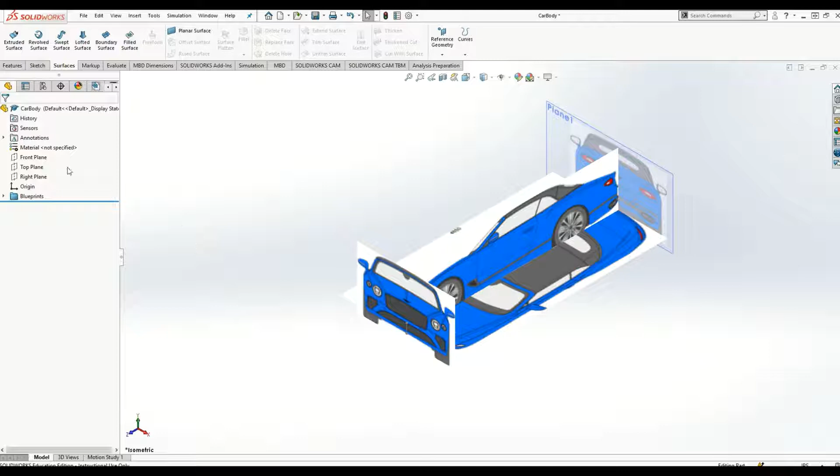We'll again start on a sketch on the top plane. Control 8 to bring it normal. I'm going to do this portion of the hood and just use mirror.

I'm going to start in the center here, drawing a line, and then use a spline. Remember, when we use splines, we want to use as few inflection points as possible, and just use these controls to control the spline. Then I'll exit sketch and create a sketch on the front plane.

New sketch, Control 8 to bring to normal. Here is my previous sketch down here. When I draw this new sketch, I want to make sure that the start and end points are the same as the start and end points of the sketch we just drew. So I'll use a line again, hover over the origin, drag this up, and draw a line there.

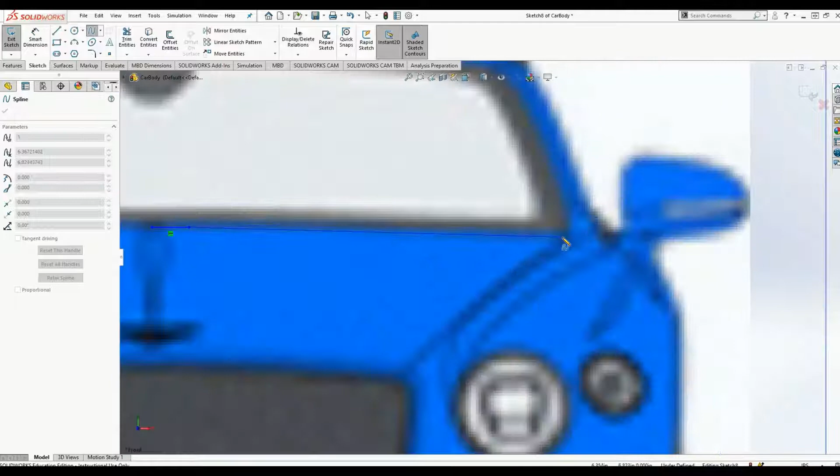Then I'm going to use a spline to go to this point here. I don't want it to be horizontal. Oh, I forgot to make this endpoint the same length as that one, so I'll do it right there. Now these points line up.

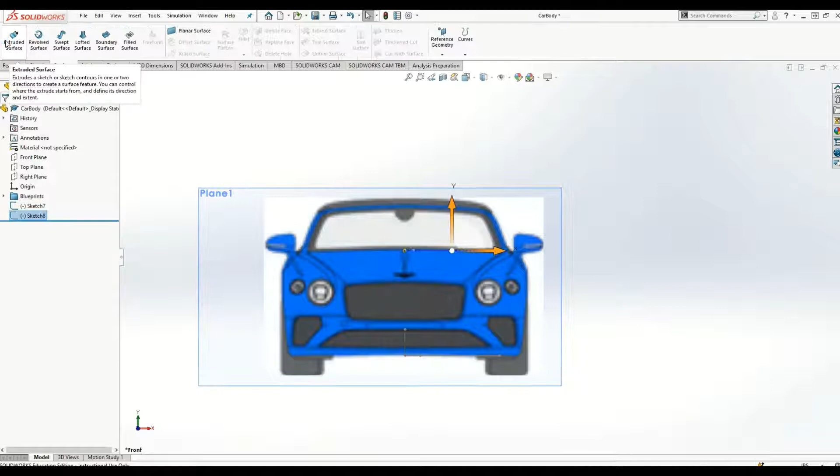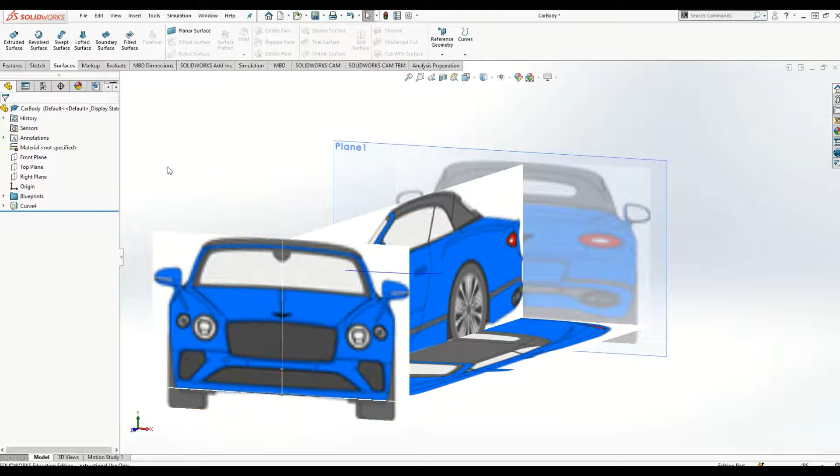Now I'm going to exit sketch, and I want to bring this sketch up to this sketch here. So I'll hold shift and select both sketches, go to the features tab or surfaces, curves, project curve. There's the curve, click the check mark. It brings this curve from the top plane up to where it is on the front plane. If I go back to the top plane, Control 8, there is our curve right there.

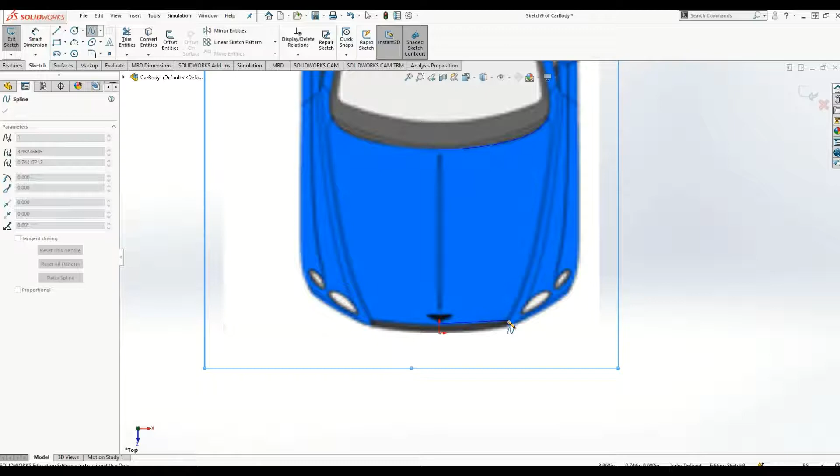I'm going to do that exact same process right here. I'll start a new sketch on the top plane, and draw a spline from the center here over about right here. I'll bring this down a little bit. Remember, use as few inflection points as possible. That's good for now.

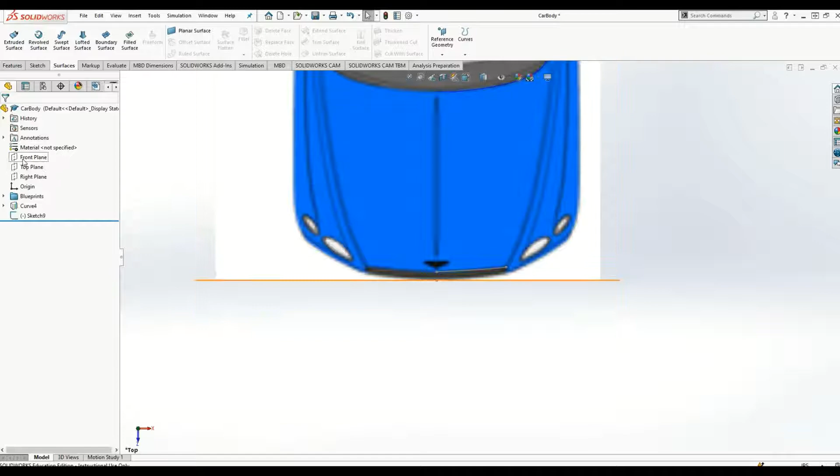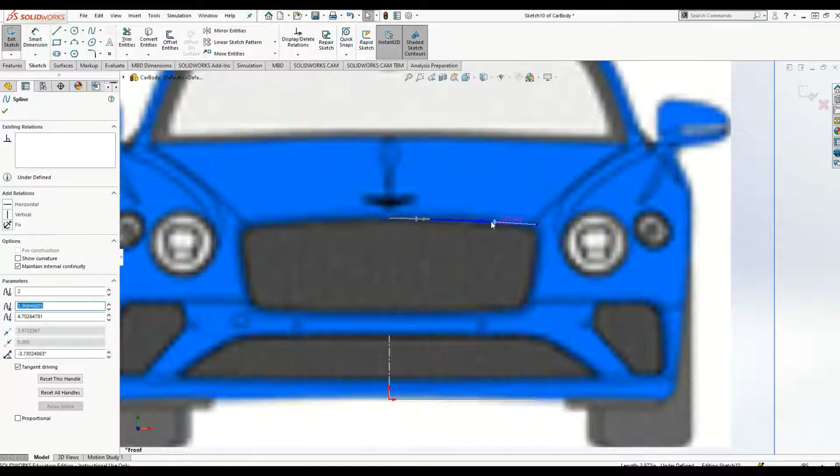Then I'll exit sketch and create a new sketch on the front plane just like before. Hit Control 8 to bring to normal. There's the sketch we just created on the top plane. Now I'll use a spline, drawing from here to here, making sure those are lined up. That's good for now.

Then exit sketch. I'm going to hold shift and select both of these sketches, go to curves, project curve, check, and there is our curve. It went from the top plane up to there.

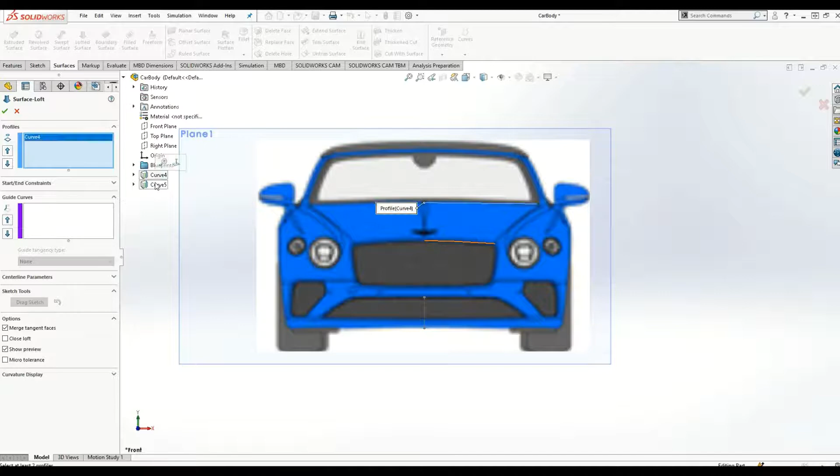Now I have these two curves. If I go to Lofted Surface, I'll select these two curves, switch to isometric view with Control 7. I'm going to move this green point over so that they're aligned. Here is where my curve would be. If I hit Control 1, it's not following this curve right here.

So I want to add a guide curve. You don't need to add a guide curve if it works for you, but I would like to. I'll hit X and go to my top view. I'm going to use the same method, but with the top view and the right view to project my curve. So I'll create a new sketch on the top plane and add a spline here.

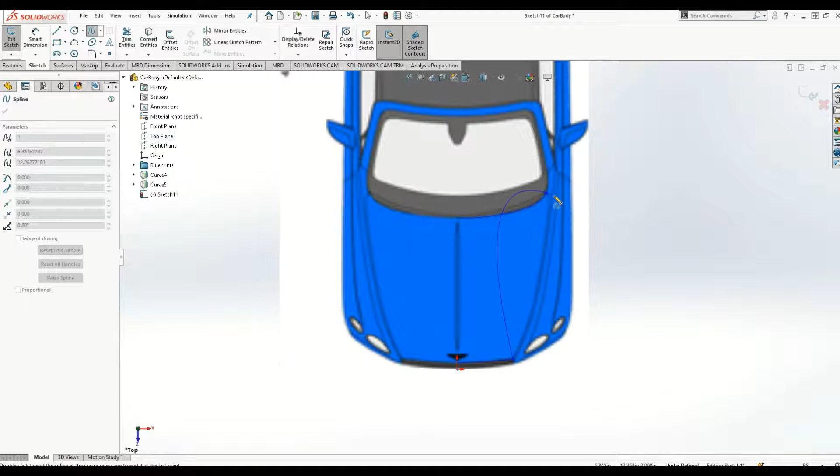All right, and then I want it to be coincident with both of those ends there. And then I'll use my spline tool. I use the diamond shape controls the most, and then I'll use the arrows as well. And then I'm going to exit sketch.

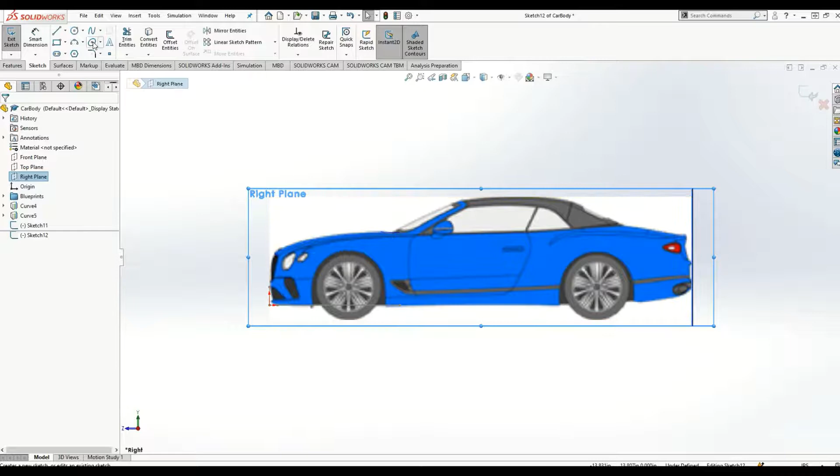Then I'll create a new sketch on the right plane and do Control 8 to bring to normal. Here's the sketch we just drew, and we want to project it up here in the correct shape right there. So I'm going to use a spline and have it coincident with that one and coincident with this curve, escape. And then I'm going to use these controls here.

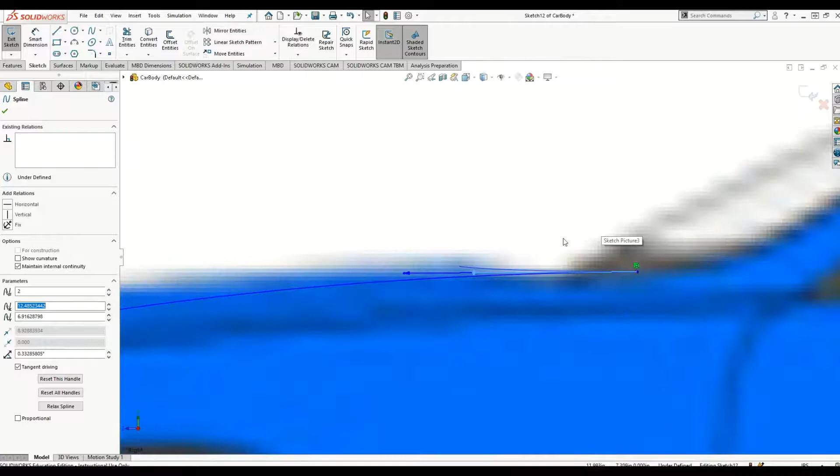Okay, I want to bring that down a little. All right, where it's below this one. And I think I want that. All right, that looks good to me. So I'm going to exit sketch.

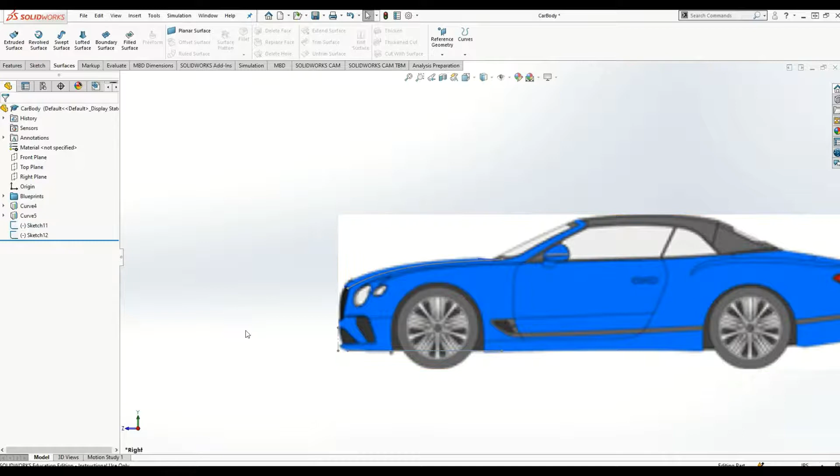And so now I have these two sketches. I have the first one I drew on the top plane down here. The other one I drew is on the right plane right here. But the right plane, this is going to be in the center. So if I hit Control 1, you can see that this sketch is in the center, the one drawing on the right plane. So I want these two to meet each other.

I'm going to select both of those sketches and click Project Curve. Check mark. All right, so now we have that.

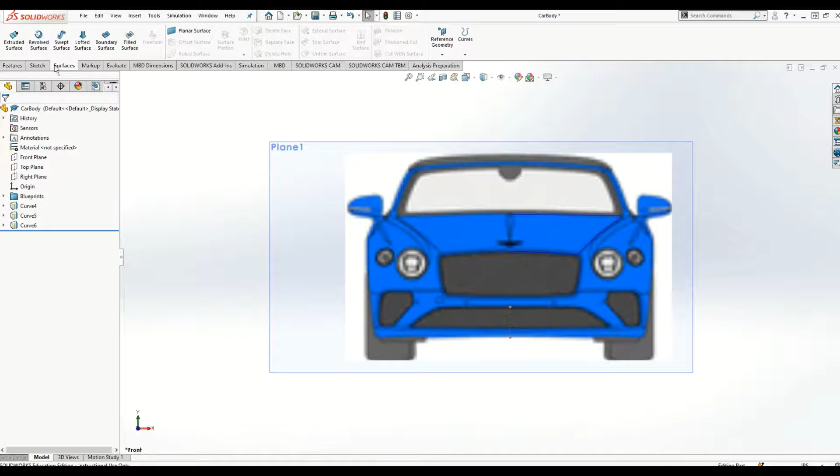Now we are going to create our surface. If your shape is more intricate, you can use a boundary surface. I'm going to use a lofted surface because this one is pretty simple.

For the profiles, I'll click both of these. And again, I'm going to move the green dot so they're aligned. And for a guide curve, I'm going to select this curve right there. Make sure it's curve 6.

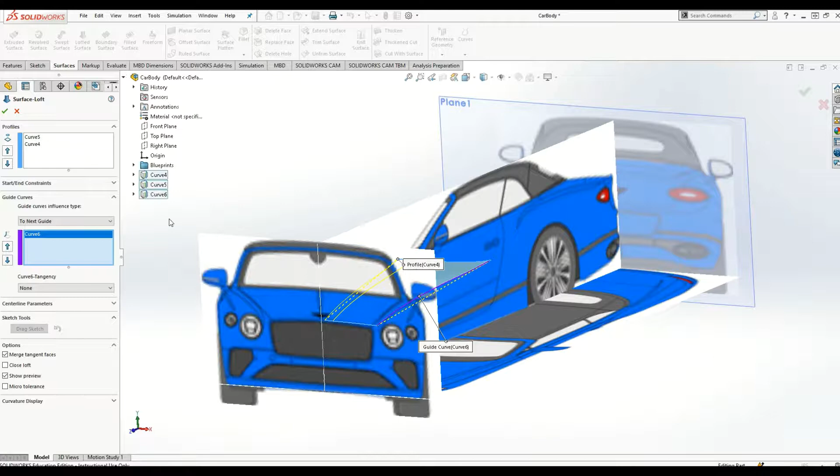All right, awesome. And so now if I go to the top view, you can see that it matches that curve. I still have this empty area here that I'm going to have to fix, and I will do that next. So I'm going to click check. All right, so I have that.

Let's see here, Control 5. So overall, you want to try to do half the car, and then you can mirror it to the other half so that both sides are identical. So I would recommend doing that towards the end. However, I'm going to show you how to do that.

What you can do is if you have your edges on, it's going to have this line here, but I'm going to turn the edges off so I can't see that line. So I'm going to go to...

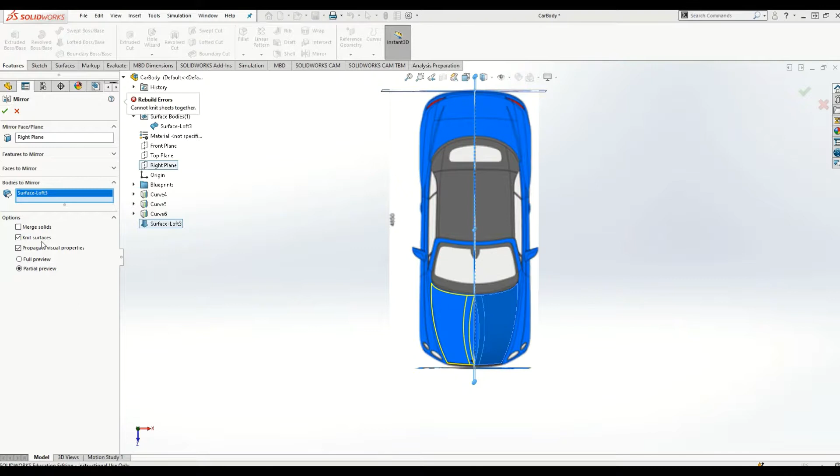Features tab, and I'm going to use a mirror. My plane is going to be the right plane, this plane right here, because I want to mirror it about that plane. And the bodies to mirror, I'm going to click this arrow down here for bodies to mirror and select this one. All right, and then if I merge, oops, I don't think it's going to let me, yes, it won't let me knit the surfaces yet. So I'm going to just hit check now.

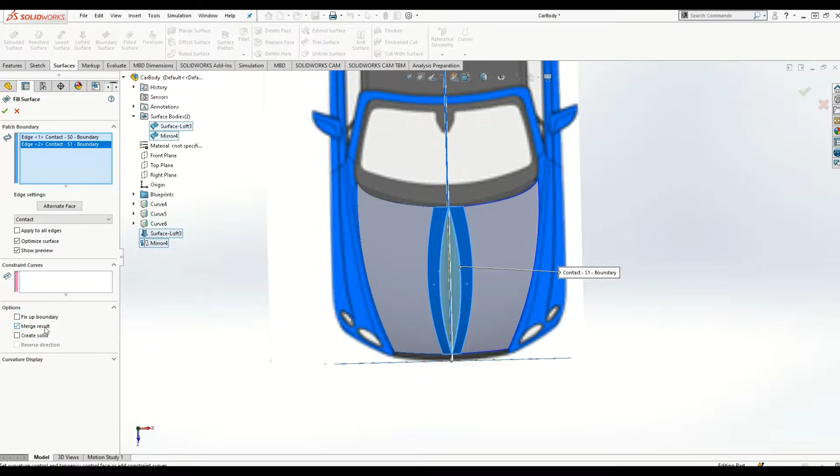All right, and so say that you do have an empty space like this. What you can do is go to surfaces and use your Filled Surface. And I want to patch the boundary between those two. All right, and I want to merge the result and click check mark, and now you have this right here.

Now, say that I still have more of the hood to complete, but say that I complete all of this hood and I want to have some organization in here. So I'm just going to select all of these, hold shift and select all of these features, right click and go to add to folder, and then I could type in hood.

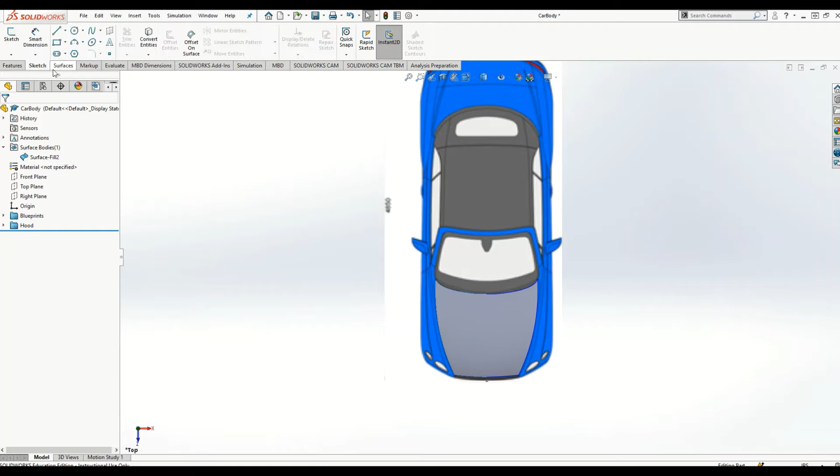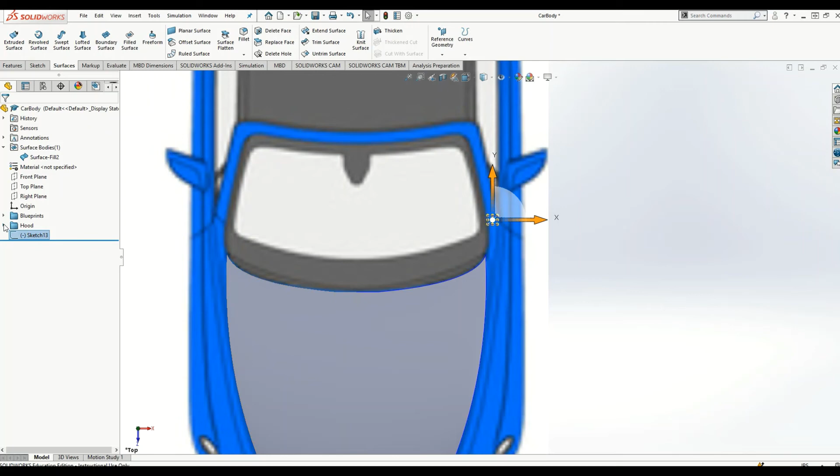And so then when I add the next sketch here, I'm just going to do a random sketch so you can see top plane, new sketch. Say that I want to start modeling this part right here. I could see here. Okay, exit sketch, and you can see it's not within the hood folder. This just helps with organization.